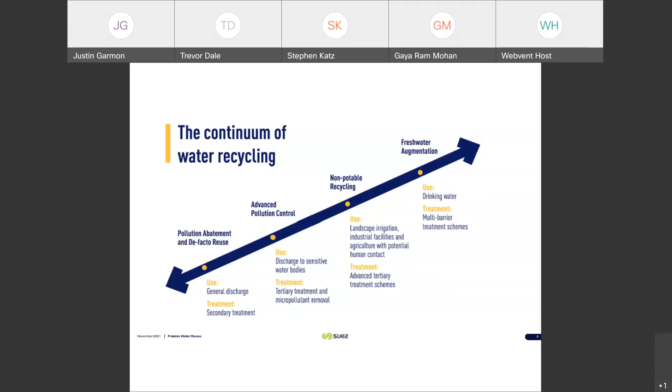Perfect. Thank you. Really what's driving potable recycling is a multitude of different factors. I think one of the big ones is acceptance. I think crisis has really led us to understand that these concepts of having no new water are upon us, and that we are able to safely do this, and the acceptance is growing. Obviously, the scarcity is a huge impact. Having no real other solutions has been a big piece of this.

Huge issues with demand growth and the impacts on GDPs of countries and regions based on the inability to have water. Having a resilient means of water is important. Having that freshwater supply diversified and able to be local and sustainable is very key.

A big one is also the cost, and I think that the costs of recycling have really been competitive when you look at other options of augmenting freshwater supplies. And there's an environmental piece where you're looking at the protection of local waterways for uses for freshwater in a community, but also for other environmental purposes and recreational uses as well.

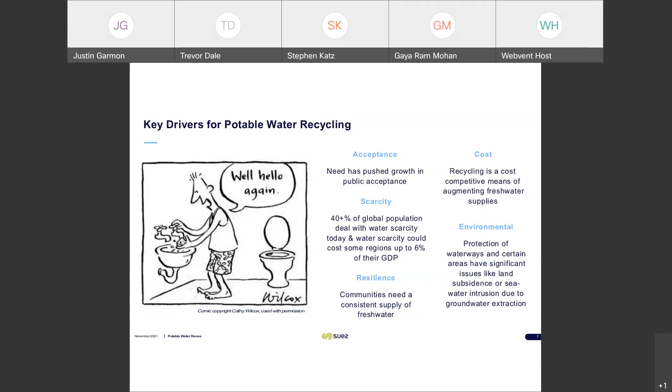When you look at what we're doing, we have the technology today to really treat any quality of water to any end use quality. It's just sort of how we put these elements together and how we build these flow sheets. In the potable reuse world, we're really looking at addressing organics, particulates, nutrients, pathogens, the trace chemicals, and depending on what your source is, some dissolved salts as well.

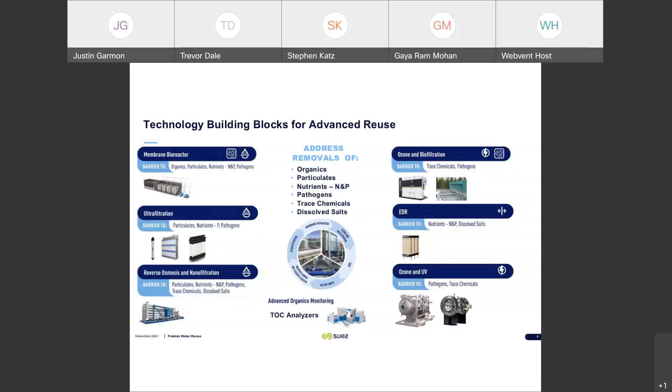There's a variety of different technologies that can play into these flow sheets, and what we're going to look at today is a very innovative flow sheet that the Gwinnett County team had put together and has been implementing for a number of years. So when we're looking at putting together flow sheets, there's a lot of decisions and elements that come in. You have a starting water quality that differs.

You have regional implications that can come in, where you can put your waste streams, how you can extract your waste stream, or how you can extract your water, where it comes from, how you can reuse it within the community, your treatment objectives, your regulatory framework, if it even exists at the time.

So what we've seen is over the years, we've built a bunch of different flow sheets, and we continue to innovate in this manner. And I think this is the perfect transition to pass it over to Gaya and let her dig into the history of what was done at Gwinnett County and how that flow sheet was built, and then how they're moving forward with it. So over to you, Gaya.

Thank you, Stephen. Okay, I'm the host now. Yeah, I just passed it, sorry. Gotcha. Okay, are you all able to see the next slide here? Yep, you're good. Okay, thank you. Well, thank you, Stephen, for passing the ball to me.

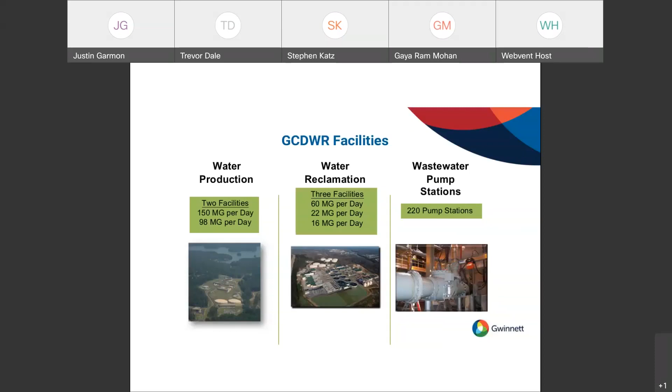Gwinnett County is the second most populous county in Georgia. Our resident population is close to 1 million. We're a pretty sizable utility, and we have 2 drinking water production facilities, 3 water reclamation facilities, and a whole bunch of wastewater pump stations that we have to service and maintain. And this is just a map of Gwinnett County and the location of our plants. The 2 drinking water treatment plants up top, Shoal Creek and Lanier Filter Plant.

Anybody that's visited Georgia or heard about Lake Lanier knows it is a vast lake. It's got thousands of square miles of area, but less than 4 to 5% of the watershed lies within our county boundaries, and that's our only drinking water source. So when I say we take care of our lake water quality, we definitely do.

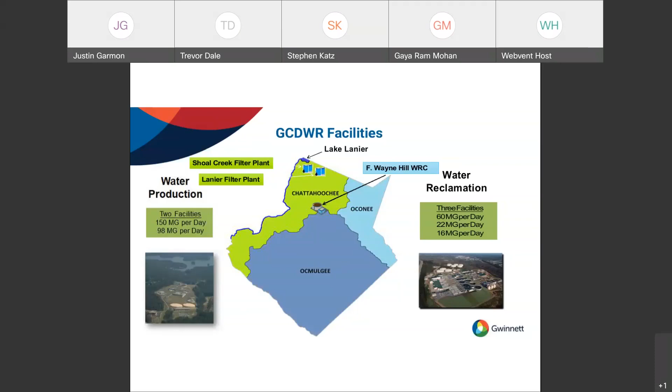The 3 water reclamation facilities, F. Wayne Hill, Yellow River, and Crooked Creek, are spread throughout the county. But F. Wayne Hill is the most advanced and the largest wastewater treatment facility in Gwinnett County, and it serves more than 50% of the population. And most of the water that's treated at F. Wayne Hill is put back in Lake Lanier, which, like I mentioned, is also our drinking water source.

F. Wayne Hill is a 60 million gallons per day capacity plant. This plant was built in 2 phases. Originally, it was only a 20 million gallon per day plant, which was completed in 2000. But by the time construction was completed, the population more than doubled. And so we not only had to go from 20 to 40, but we had to expand from 20 to 60. And that was completed in 2006.

When I show you the process flow in the next slides, you'll see the phase 1 process flow and the phase 2 process flow, where we added ultrafiltration membranes. And F. Wayne Hill actually is one of the world's largest membrane plants. We discharge to Lake Lanier. We practice indirect potable reuse. We treat it to the highest quality possible, specifically for that reason.

And like I mentioned, even though it's located towards the north end of the county, we provide treatment to more than 50% of the county's residents. And so every drop of water that enters the plant is pumped to the treatment plant via force mains. This is the simplified version of the process flow for F. Wayne Hill Water Resources Center.

Up front, you have the conventional treatment plant where you have preliminary treatment, screenings, grit removal, primary clarification, and then we have biological treatment where we get both biological nitrogen removal and enhanced biological phosphorus removal. And then following biological treatment, we have secondary clarification. At this point, this is still a conventional treatment plant.

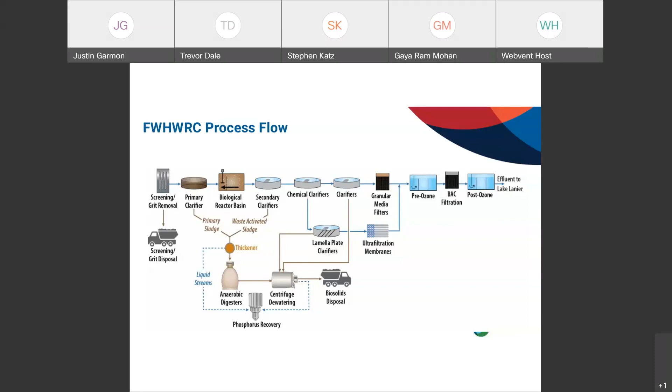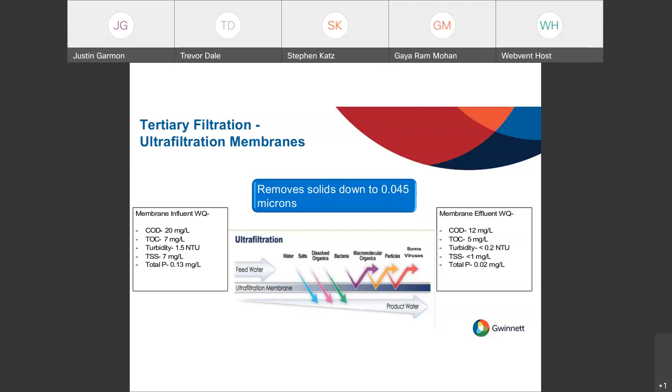Our membrane filtration system came online in 2004. Over the years, we've learned a lot through different operational challenges. Originally, we used ferric chloride at the lamella clarifiers ahead of it, which fed the water into the membranes. We had the 500Cs, and we've just now recently installed the 500Ds. We're in the process of starting another project to add more membranes to the system and get more out of the building. We've got a lot of life out of our old 500Cs.

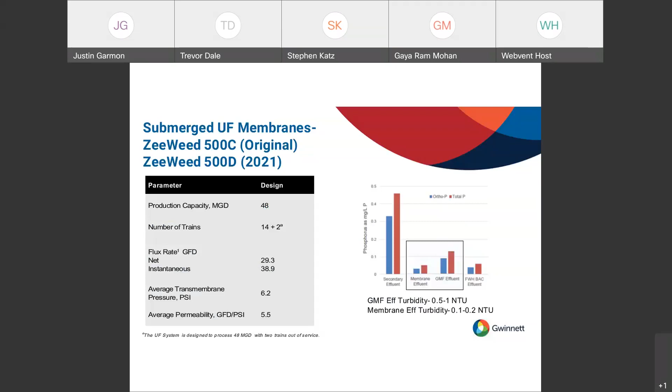They were installed in 2004, and we just got through replacing them all last year, or in the first of this year. Instead of replacing all of them at one time, we did some enhanced cleanings and got some more life out of them. We tried different chemicals to remove the fouling, and we found that ascorbic acid did the best when we heated it up. As you can see from the pictures on the slides, there was all iron fouling, and we removed the iron fouling and got a lot more life out of them.

The biggest issue we had wasn't the hollow fibers themselves, it was the actual potting, from exposure to the chlorine in the water and stuff. So the noodles were still good, it was the potting that held it all together that failed. We actually were just awarded the patent for the cleaning of the membranes, and we saved time and money by extending the life up to 17 years versus 10 years, which is the normal standard.

Sorry. We also swapped over recently in the last couple of years from ferric chloride to alum. We saw a great benefit from doing that as well, because iron is so bad on the membranes that with the alum, we've seen a lot of benefits from using the alum over the ferric. Pass it back to Gaya now.

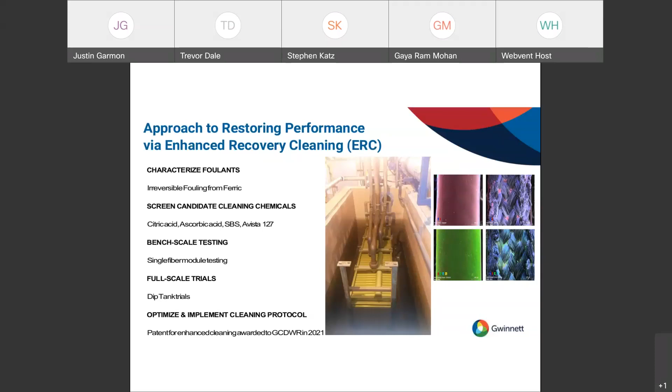So it definitely helped. It bought us some time. That helped us make a decision on which way we had to go with replacing those membranes, and we found that upgrading from 500Cs to 500D certainly helped us. And like Justin mentioned, we were able to add more membrane surface area and reduce the flux, which, talking about designing for the future, gives us some leeway. So if in the future we see increased flows, we'll still be able to deal with those with the existing membrane setup.

And the benefits are summarized over here. We did get about 34% increase in permeability across all the trains. By the time the bench scale trials were done, we got the results. We implemented them in full scale. We used dip tanks that we have. I'm sure Justin loves having those dip tanks. We were able to isolate those cassettes, modules, put them separately in dip tanks from each train, clean them and put them back in. It added about 4.4 billion gallons of additional production and a lot of energy savings.

So it extended the years: from an industry standard 10 years, we got another 7 years, which certainly has helped us in planning our capital improvement project and phasing out, because these are not cheap projects, right? There's several million dollars involved in them. So it definitely helped us make the right choice. And now we've replaced our original 500Cs with 500D ZeeWeed membranes. That was a little bit of a brief on how we practice advanced treatment at Gwinnett County using ultrafiltration membranes.

And I would like to now touch a little bit on ozone application at Gwinnett County. We ozonate 3 times, like you can see in this slide. So you can take it for granted that Gwinnett County loves ozone. So once the conventional treatment is done and it enters the advanced treatment, and you have that combined effluent from phase 1 and phase 2, we pre-ozonate it, and you can see how the COD limit is 18 milligrams per liter, total phosphorus permit is 0.08, ammonia of 0.4, TSS of 3 milligrams per liter, and

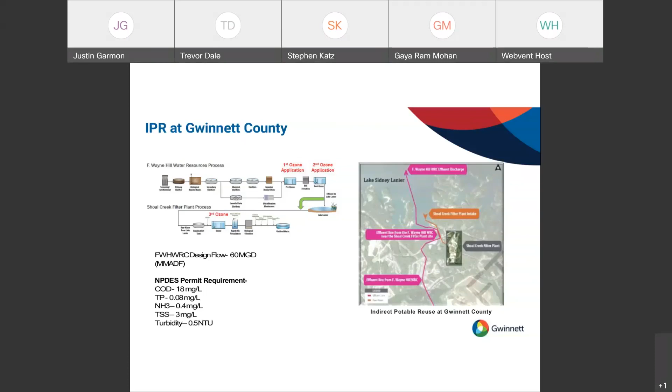And so, if in the future we were to go to a DPR scenario, and thinking about that, Denise Funk was a principal investigator on a WRF 4777 WERF 15-11 project. This is when we actually tested two different trains. One was just mimicking our drinking water plant with pre-ozonation, coagulation, flocculation, followed by biofiltration, where we just tested direct lake water.

And then in a parallel DPR pilot, we actually tested various blends or ratios of F. Wayne Hill effluent combined with raw lake water. We tested 15%, 25%, 50%, and 100%: 15% F. Wayne Hill with remaining lake water, 25% F. Wayne Hill effluent with remaining lake water, 50% F. Wayne Hill effluent with remaining lake water, and 100% F. Wayne Hill effluent. It was more than a year-long operation of the pilot. We got some really useful data out of it.

Only the 15% blend met all the primary and secondary MCLs for drinking water. Only about 3 out of the 300 plus analytes we analyzed saw some exceedances in the higher blend ratios that we tested. But primarily, two interesting things we found were, one, for an inland utility such as Gwinnett County, where brine disposal is going to be pretty expensive, an alternate treatment mechanism that's just as robust as an MF/RO process: the ozone BAF proved to be really good in terms of removing most of those contaminants.

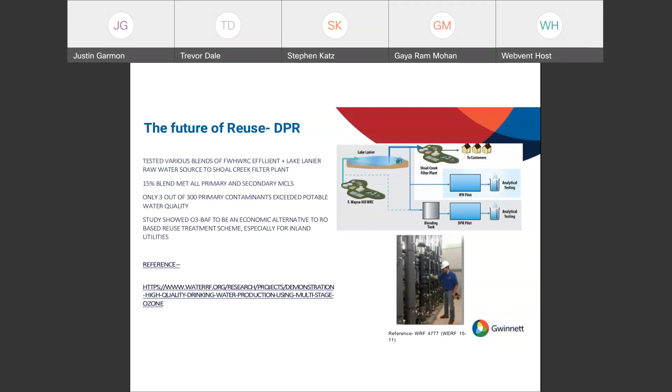And also in terms of economics, there was an economic study that was done as a part of this pilot, and it was shown that an ozone BAC process or BAF process would probably be half the cost of what it would cost you with an RO MFRO sort of system. So that was a really interesting pilot that also won several awards. And like I mentioned, Denise, who was with Gwinnett County at that point, was a principal investigator of this one.

And then I just wanted to touch a little bit on the evolution of ozone at F. Wayne Hill. The original installation was in 1999. We had 3 Ozonia OF-208L ozone generators. They were rated for 900 pounds per day at 8% ozone concentration. And then when we expanded the plant in 2004, we added 2 more. And then we segregated them as the 3 for pre-ozone and the 2 for post-ozone.

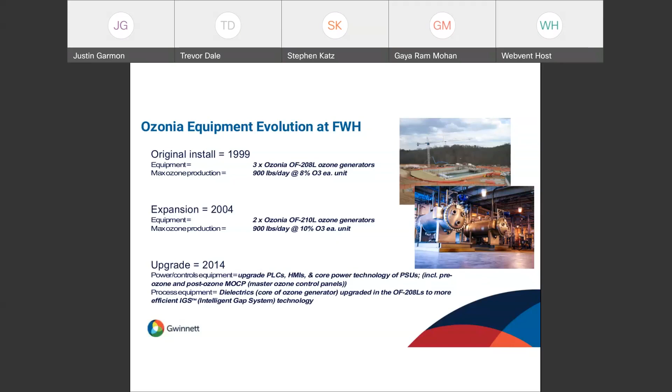And then in 2014, we did further upgrades to power and control equipment, as well as process equipment. And as recent as 2020, 2021, we've had some more ozone upgrades in terms of hardware. We had the side stream injection with downflow tubes, and now we've gone to a multiple manifold system for ozone diffusion. So we've certainly tried to keep up with advancement in ozone, and the generators we deal with have definitely been reliable, and we've had pretty good experience with those.

And I wanted to briefly touch on this again with the advanced treatment scheme of things. Again, just focusing on pre-ozonation and biologically activated carbon filtration. Like I mentioned, you'd have filter cells where you would basically add virgin GAC, and once it's exhausted and runs out of adsorption capacity, it would passively transform into a BAC. And one interesting scenario that happened to us in full scale recently was we filled 6 cells worth of virgin GAC.

And once those were exhausted, we were thinking they would just passively transform without there being a gap, and we would just continue to get good water quality. And we noticed elevated organics right after like 4 to 5 months of installation, which is indicative of when the adsorptive capacity was exhausted.

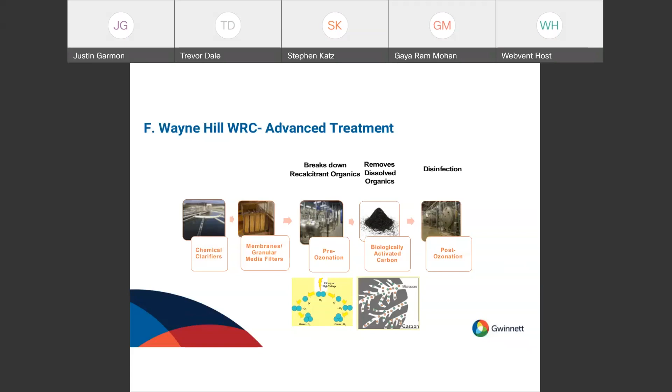And so we got funded for a WRF project, Water Research Foundation project, where I'm the principal investigator. We're trying to understand and improve reuse biofilter performance, because biofiltration has definitely been studied in depth, and there's a lot of monitoring tools and material available for the water world. But now that we live in a one water world, there's more awareness and more interest in potable reuse, and that's the future of the water industry. And so we're trying to better understand what happens when this transformation occurs from GAC to BAC.

We separated this out into pilot and full scale. We have tested some seeding strategies using concentrated activated sludge, and also different blend ratios of previously acclimated carbon. We've got some really interesting results in pilot scale. And our end goal with this project is basically to develop guidance for utilities that are employing biofiltration, and hopefully not just passive biofiltration, but engineered biofiltration in reuse applications. How do you circumvent such issues? How do you not see a gap in acclimation? And how do you allow your filters to operate in steady state throughout?